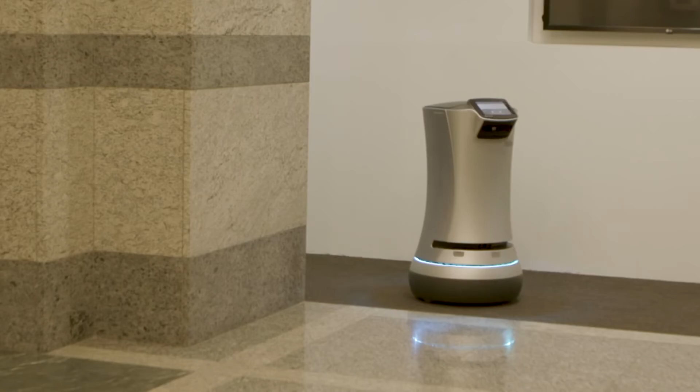Singapore is running out of space to develop and prosper. There are more developments now, and it's harder to find land. Now, the little red dot is being re-engineered for the 21st century. Nobody has done it before. This is the only job that allows you to work on a smart city project in Singapore.

We are going from about 350 megawatts of solar to 2 gigawatts of solar, and that's a huge jump. New megaprojects using state-of-the-art technologies will harness the power of the sun. It's a kind of new for Singapore to have solar panels on water.

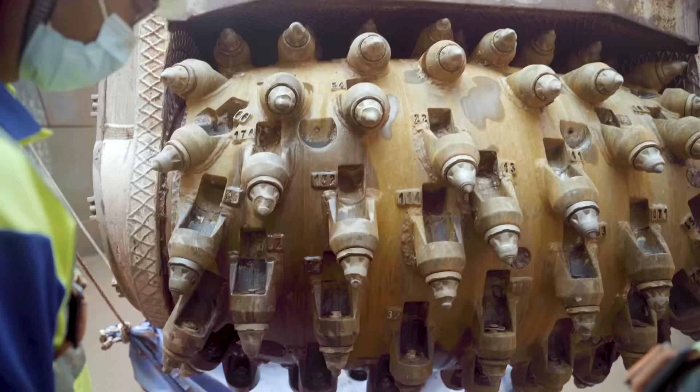Automate its ports. I can't imagine. We will be developing a 60-plus berth. And dig deep. I did not believe the space-saving part until I saw it with my own eyes. This is what engineering is all about.

All designed to find more space and allow Singapore to flourish. This is a journey into Singapore's Tomorrow City.

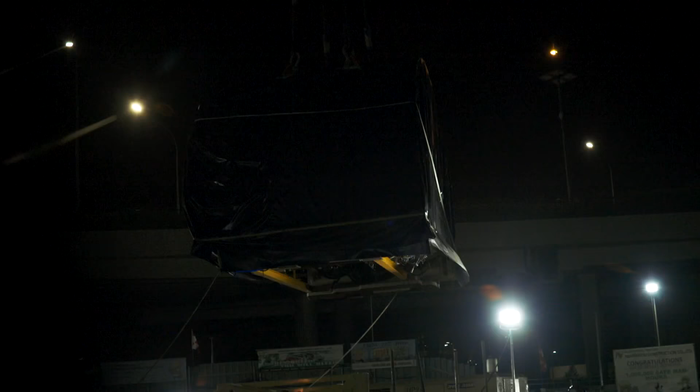It's a critical moment for one of Singapore's new megaprojects. One of the biggest machines on Earth is being delivered to a site in the heart of Singapore. Slowly wire. A tunnel boring machine, or TBM. Today we are lifting all the main bodies for the TBM, just unloading at the site. We do this at night because the oversized cargo is only allowed to transport after 9:30 p.m. The TBM is so big that all 6 parts have to be delivered one at a time.

In Singapore, space is a luxury, both on the surface and at its only landfill at Pulau Semakau, which is reaching full capacity. To create more space, one project is going underground to revolutionize waste disposal and water management.

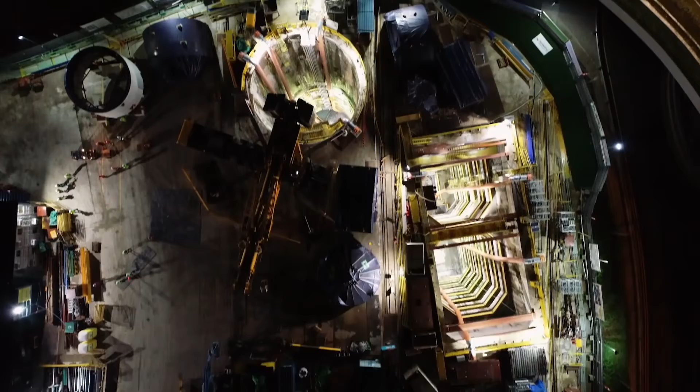The Deep Tunnel Sewerage System, or DTSS, is one of Singapore's biggest underground projects at about $7 billion. This is the second phase, where 19 TBMs will carve out hundreds of kilometers of tunnels underground that will take wastewater across the island to different reclamation plants. To maximize space, the DTSS system will be dug deeper than any existing road and rail network, at depths between 35 to 55 meters.

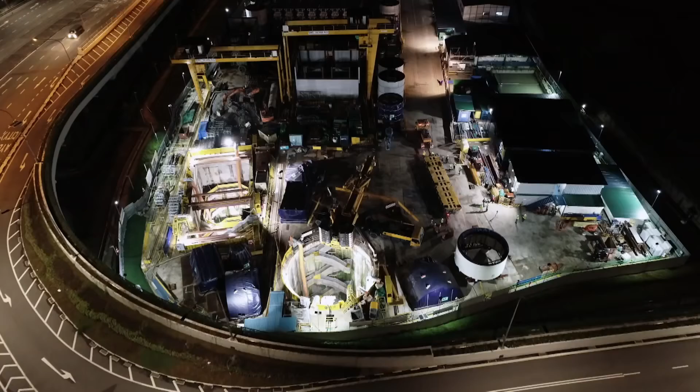This is one of 50 shafts, the entry into the underworld, a gaping 10-meter wide hole known as Shaft M. It's nearly 50 meters deep.

The work site at Shaft M is crammed with construction equipment, and lifting supervisor Johnson and his team must now find space for these 6 massive parts. Okay, swing stop, stop. Slowly wire down. The space constraint is the biggest challenge for us today.

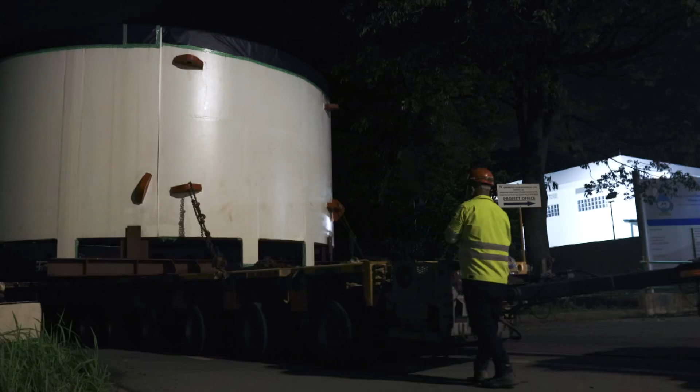Going to shift the front body lower, 2 meters inwards. Then we're going to prep the cutter head unloading area with the timbers. It's the heaviest and it's the most delicate as well.

Once all the sections of the TBM are delivered and unloaded, they must be lowered one by one into Shaft M and then reassembled underground. The most important section of the entire TBM is the cutter head.

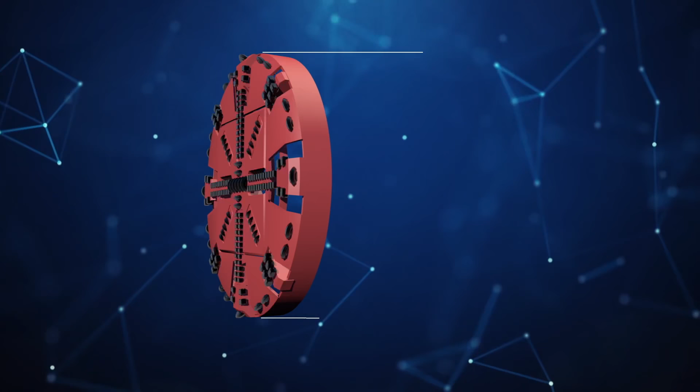The cutter head has a diameter of 7.5 meters and comprises of dozens of heavy-duty cutting discs that chew away at rock at a rate of approximately 3 meters every hour.

Behind the cutter head comes the power source. The TBM is multi-purpose. As the cutter head bites away, this section erects the walls of the tunnel, which are made from these concrete rings.

The cutter head generates huge quantities of waste or slurry, and this section of the TBM is its waste disposal system. To drive the TBM forward, thrust cylinders push against the newly built tunnel rings with a force great enough to shift an elephant.

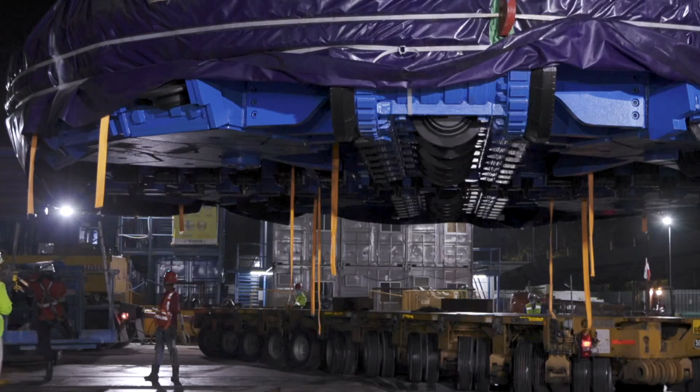The cutter head arrives at the site. All right, a little bit, swing right. The engineers take special care unloading this spaceship-like equipment. Okay, swing stop, swing stop. Boom up. Boom up. Okay, boom up, stop.

The cutter blades are precision engineered. The team positions wooden blocks underneath to prevent any damage to the blades. Slowly swing to your left.

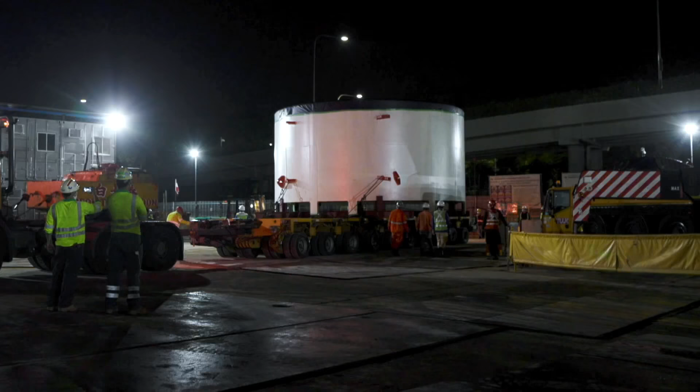By the time the engineers complete the unloading, dawn is breaking. Job well done, guys. Good job.

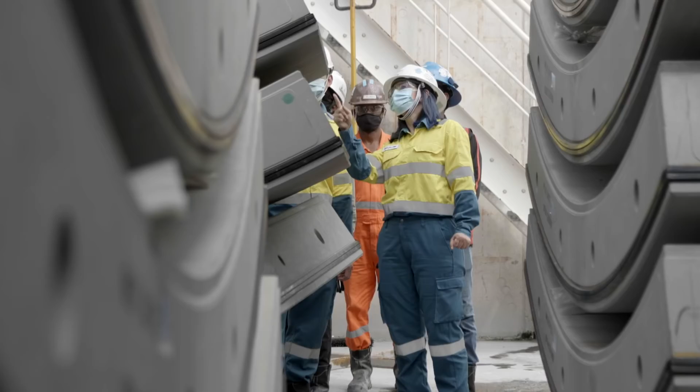It will take another 6 weeks of preparation before the TBM sections are ready to be assembled in the tunnel below Shaft M. The deep tunnel sewerage system is not scheduled for completion until 2025. It is being built to last for at least a century. And so, engineers will inspect every detail of work during construction to make sure nothing is overlooked. One of the engineers on the inspection team is Wu Lai Lin.

So what are they doing in the shaft now? Today's exercise. I've been doing DTSS since DTSS 1, which was completed in 2008. So yes, we have been talking about the Deep Tunnel Sewerage System, or DTSS, for many, many years.

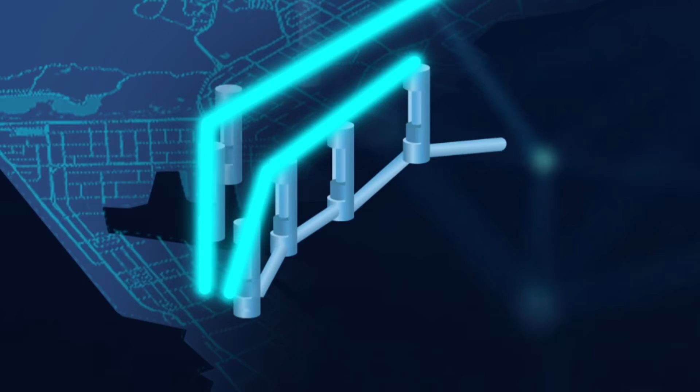By the time the DTSS is completed, it will free up 300 hectares of land above ground, more than half of which is currently being taken up by pumping stations and reclamation plants. The 19 giant TBMs still have 100 kilometers of tunnels to construct.

DTSS-2 follows the heavily used Ayer Rajah Expressway. To get all the TBMs working away below ground, 50 vertical shafts must be sunk along the route of the expressway, without disrupting traffic. So the first thing we do is site the launch shafts, sink the launch shafts, and then we would launch the TBMs from these shafts.

Then the TBMs will tunnel along happily, hopefully, until they reach the retrieval shaft, which is where we take out the machines.

Siting shafts along the Ayer Rajah Expressway is a challenge. Space is definitely one of the challenges. Can we find space on the surface to site our shafts? Or more importantly, to site a shaft big enough where we can actually launch our tunnel boring machines. There are more developments now, so it's harder to find land for your shafts and things like that.

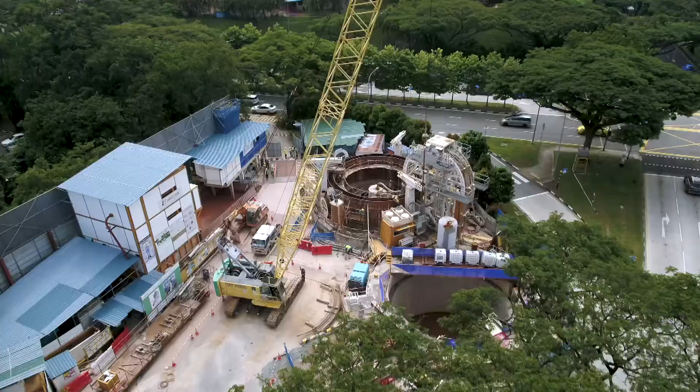At Lower Delta Road, a new piece of machinery is changing the way shafts are being constructed and saving space at the same time. It's called the Vertical Shaft Sinking Machine, or VSM. I did not believe the space-saving part until I saw it with my own eyes.

It enables the construction of a shaft without the need for men to be inside the shaft excavating away. You can actually use it in very tight places, very close to existing buildings.

Site engineer Guo Hao is here to check the progress. One shaft has already been constructed and another is underway. So this shaft is approximately 10 meters wide in diameter and is approximately 50 meters deep.

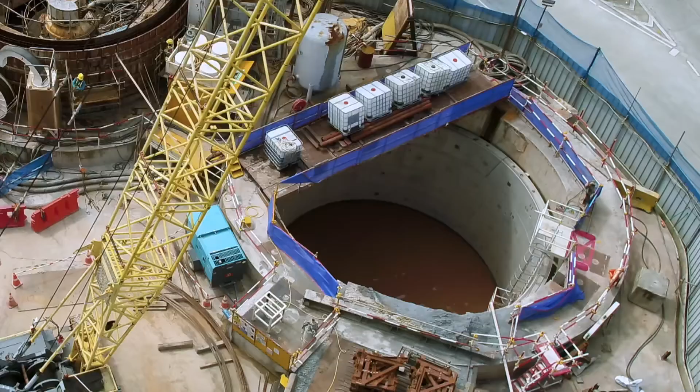How's the site progress? Everything goes well. Today we are going to finish the calibration of the VSM. So after that, we'll fill water. Okay, start excavation.

The VSM we are currently using is the only VSM machine in Asia, as it's a relatively new concept compared to a traditional excavation method.

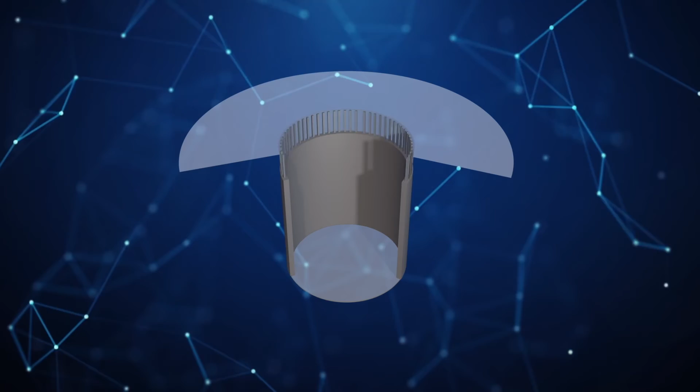The system works like this. First, a narrow shaft is excavated to a depth of about 10 meters. Then it's lined with prefabricated concrete rings. Now the shaft is ready for the VSM, which has a telescopic arm with a road head that can swivel around to dig deep. The engineers must carefully calibrate the robot arm before they set it to work.

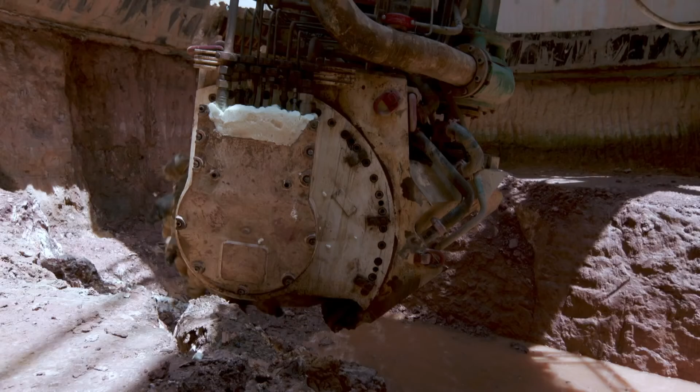So how a VSM works is that there's a cutter drum. This cutter drum will move towards the shaft in and out as the arms turn. Is it okay? Length is 80.

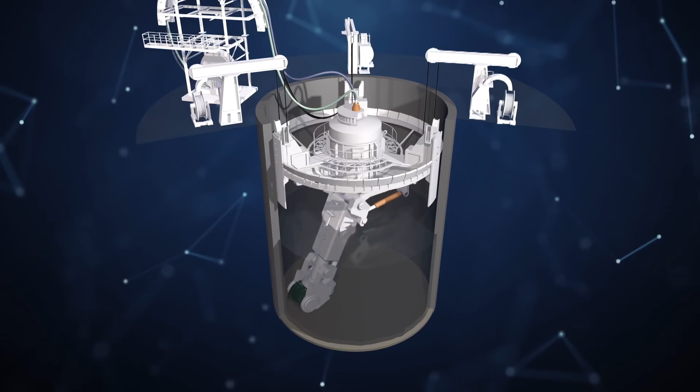The VSM is doing vertically what the TBM, or tunnel boring machine, is doing horizontally underground. As soon as the cutter drum excavates a complete circle of 100 millimeters, both shaft and cutter drum will move downwards. It takes at least 10 hours to dig 1 meter.

As the shaft sinks, engineers will insert concrete rings that form the shaft wall. Okay, stop, checking. Okay, please measure the length. Okay, done, ready. That's all. Thank you very much. Okay.

This is the last time engineers can enter the shaft. Once the telescopic arm is calibrated, the opening will be filled with water for the machine to begin the excavation work.

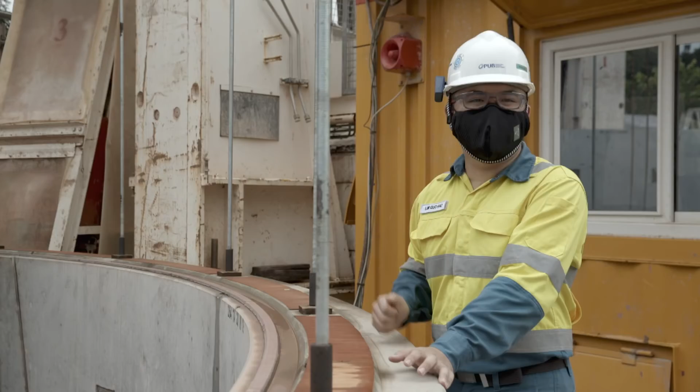This is what engineering is all about, where we come up with solutions to reduce the risk to workers and to actually improve the efficiency of excavation.

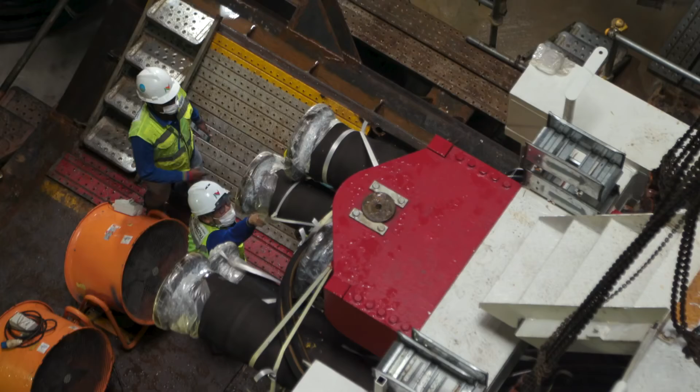The VSM system lets the tunnelers do their job in cramped urban sites, like the one at Lower Delta Road on the expressway. But underground, the engineers will soon confront the biggest challenge of all, Singapore's subterranean geology.

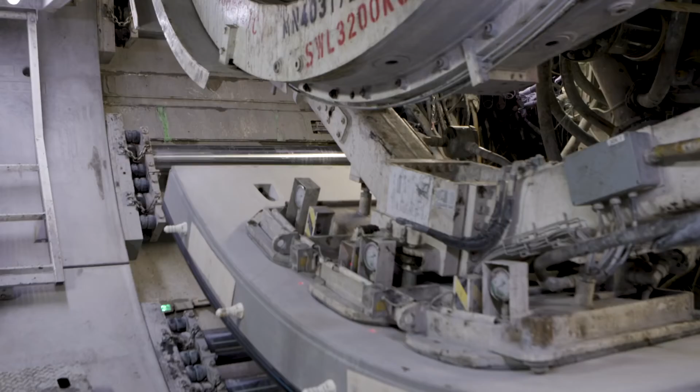Singapore's planners are spending billions of dollars to build a new waste disposal system, the DTSS. Huge tunnel boring machines are at work deep beneath our city. Down here, the biggest problem for the engineers is the geology, the hidden world beneath our feet.

So between where I am standing now and perhaps just behind the camera, the ground conditions can differ greatly. So it's difficult for a tunnel boring machine to be catering to different types of ground conditions that are changing so rapidly.

Adam Switzer is a geologist at Earth Observatory of Singapore. He has spent many years studying the geology of Singapore and understands its challenges for tunnelers.

Tanjong Rimau is one of the few places locally where the hidden world beneath is exposed. These rocks were laid down millions of years ago and over time have been twisted and folded by the movements of the Earth's crust. Much of the geology of Western Singapore is like this. Lots of different rock types, very closely placed together, and very complicated in terms of folding and small faulting, which means that in engineering, that adds a lot of complexity.

So if you look here, the rocks change a lot over a very short distance. You've got your engineering system running, drilling through sandstone, and all of a sudden you come into a muddy shale like this unit here, or you run into a bed full of big boulders, which we have in Singapore as well. Then your engineering is going to run into problems.

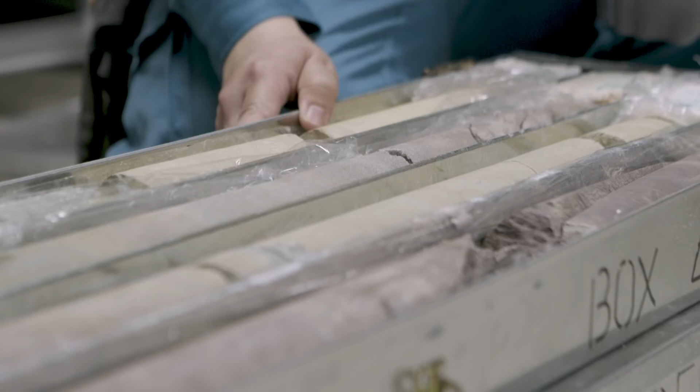The exploratory boreholes were sunk here before the tunneling started. Despite that, ground conditions still proved tough for the cutter head to tunnel through.

Can you switch to the normal screen? Yes. We are at 2.9 bar. Yes.

For engineer Christian Schilling, one of the most important tasks is maintaining the cutter head. As the TBM inches forward, the cutter blades are constantly worn out, and the huge machine must be stopped periodically for maintenance. In subterranean Singapore, it's a tricky operation.

So this is an example of a mixed face, right? Yes, a mix of rock and soil. And these are the rock. And these are the soil. Ah, these okay, can break. I can feel that this is like soil, much softer, and then the one you actually have here is actually quite hard.

To understand the ground conditions, engineers examine samples of the rocks excavated by the TBM and confirm that the rock face they've been tunneling through is made up of a mix of hard and soft materials.

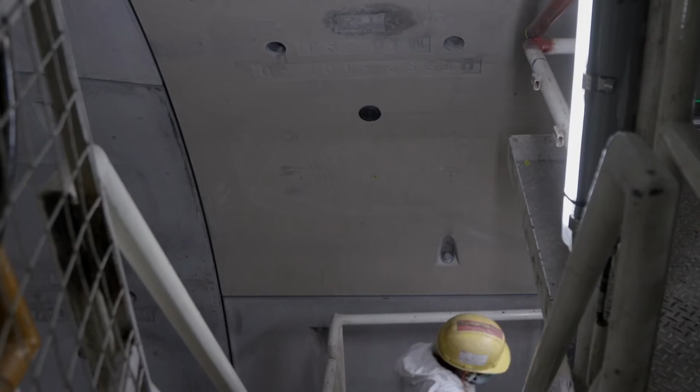At the moment, we have stopped the TBM for a cutter head intervention. To carry out a cutter head intervention, or CHI, a team of engineers enters the space at the front of the TBM.

But Schilling has to choose the right moment, when the ground ahead is stable and less likely to collapse on the workers. The geology, let's call it interesting. Up to now, on these over 500 meters, we had mainly soft rock. Now we are, since about 200 meters, in a soft geology, mainly clay. It's never a good time, because of course we want to continue tunneling. But we have to.

That time we need to check what's the level of the rock and what's the level of the soil, and based on that we prepare this face mapping.

The TBM is tunneling 50 meters below sea level, and the air pressure down here is much higher than at the surface. For the team, it will be like diving underwater, and like divers, they will need to acclimatize to the pressure.

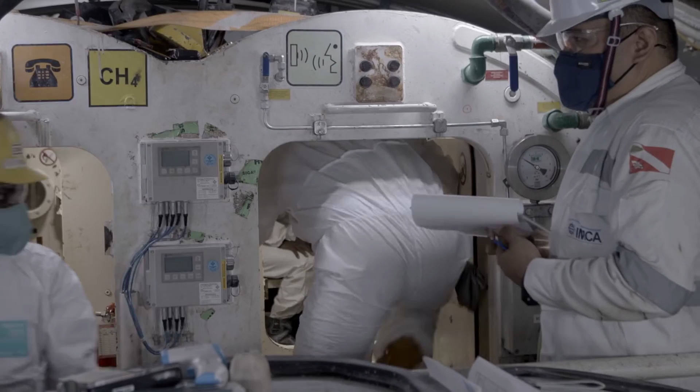This particular one, we have finished changing our disc cutters. That was 10 pieces this time. And now we still have some scrapers to change, the soft ground tools. And then tomorrow we should be on the way again.

The TBM engineers can only plan ahead if they have a good idea of the kinds of rock and soil that the TBM must cut through. As they push forward underground, geologist Adam Switzer and his colleagues continue to map out Singapore's subterranean world.

Today, they've come to the north to investigate the mysterious Sembawang Springs. It's an area famous for its 70 degrees Celsius water source, and this.

We place the eggs here, and we leave it about 1 hour. Maybe the thing will be boiled. Our eggs were a bit runny. We put them 20 minutes under the hot tap, but they were good. It was tasty, yeah, and it was fun to be able to cook them outside and in the water.

The Sembawang hot springs do more than cook runny eggs. They provide vital clues to Singapore's subterranean geology. Singapore isn't known for earthquakes and volcanoes, so the puzzle is, where is all this heat coming from?

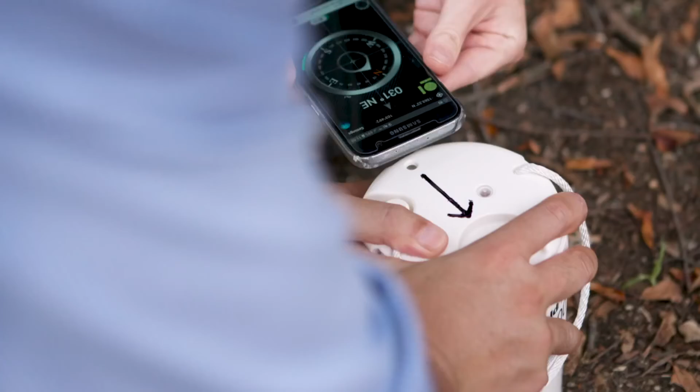At the Earth Observatory of Singapore, geophysicists are using state-of-the-art technology to solve the mystery of the springs and to look deep under the surface of the island. The hot springs are evidence of an active fault line located somewhere deep below. A fault is a fracture in the Earth's crust, and here it heats groundwater that is conveyed to the surface at Sembawang to steam up those springs. Faults can also become active and cause earthquakes.

But where exactly is this fault? And could it pose a danger for the DTSS tunnelers?

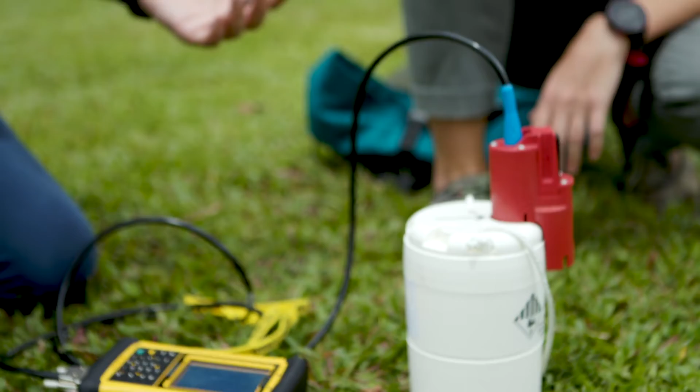So this kind of instrument is actually our ears, and the earthquakes or any other kind of seismic source are like our hands patting on a watermelon. So when this energy penetrates through the earth, it carries information about the underground structure. The team positions seismometers at locations all over Singapore to record the data.

I'll adjust the position a bit. Yeah, it's ready. It's working now. You can just take it off and then sit.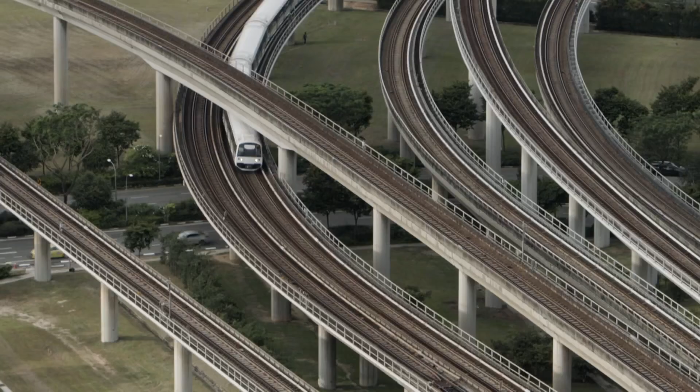Over a period of 5 weeks, the seismometers record vibrations from road traffic, construction, and far-off seismic events. The result is a digital portrait of underground Singapore, which they hope will pinpoint the location of any dangerous fault line. This is actually in the very high frequency.

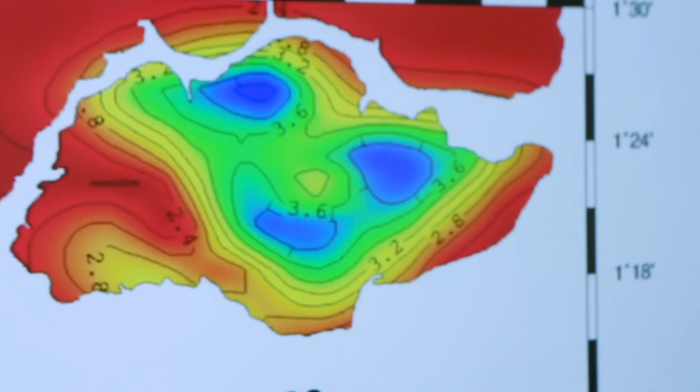So this kind of map tells us what kind of rock is under the ground. These numbers represent the speed of the shear wave traveling within the earth. We can work out where this fault line is, which separates the granites in the middle and the Jurong Formation sediments in the west. And that's really important when there's construction work underground.

The team will need more time to install additional sensors to figure out possible problems lying in wait for the tunnelers.

With expanding built-up areas and new mega projects like the DTSS, the information will provide insights and help avert disasters, like the Nicoll Highway incident in 2004.

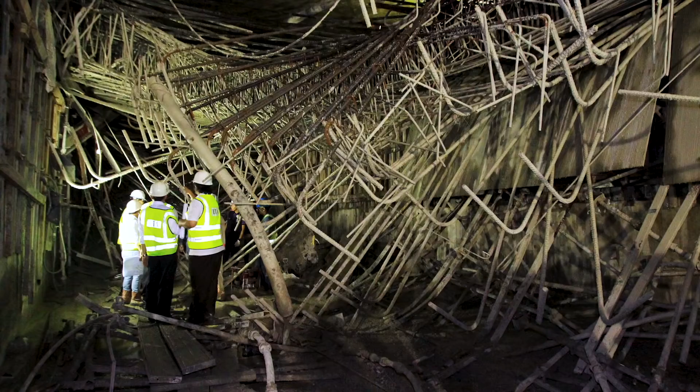On April 20th, 2004, steel supports over the Circle Line MRT tunnel below the 6-lane-wide Nicoll Highway collapsed. The disaster triggers a blackout and plunges traffic into chaos. Construction work for the Circle Line had to be stopped, and the highway closed for 7 months for repairs. The lives of 4 men were lost. This catastrophe still serves as a haunting reminder today.

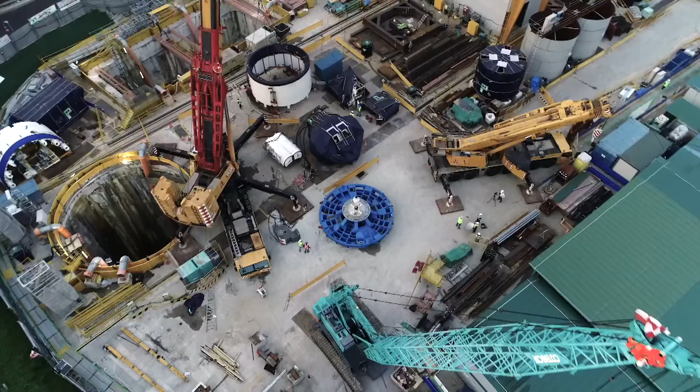Huge megaprojects like the DTSS are built to last into the next century. The tunnel is 21st century technology, but the project depends on one of the oldest of all building materials, concrete. And one of the most critical ingredients in that is running out.

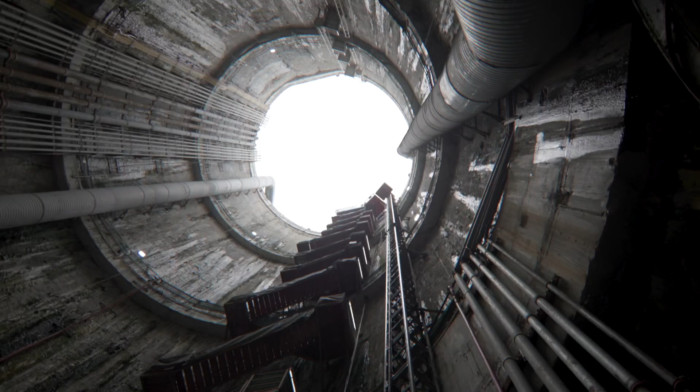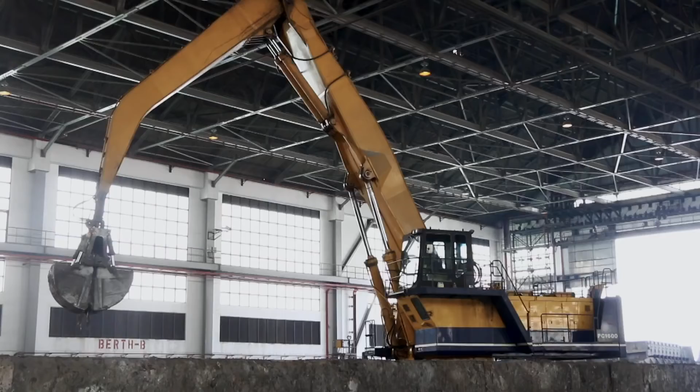There is no limit to Singapore's ambition to build the city of tomorrow and to free up space for the future. To achieve this, the new DTSS, or the Deep Tunnel Sewerage System, is burrowing deep beneath Singapore to create a network of tunnels that will revolutionize waste disposal and water management. All kinds of waste will be treated, reducing the amount of throwaway rubbish and generating energy in the process. The DTSS will redefine recycling for the future and take the pressure off Singapore's only landfill site at Pulau Semakau, which is reaching full capacity.

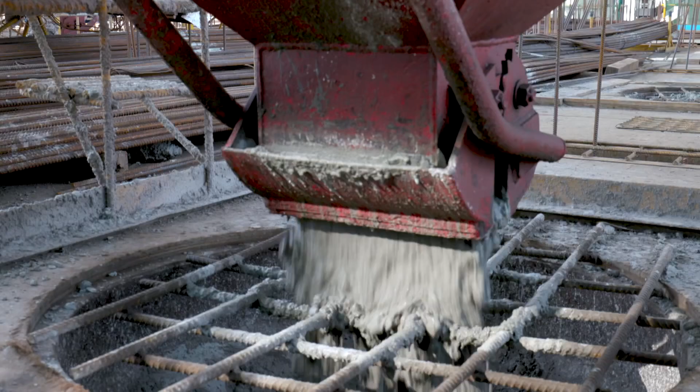But solving the problem of waste on such a scale creates another. Construction projects like the DTSS are hungry for concrete, and this demand is escalating the need for a key ingredient, sand. And sand is in short supply.

At the Nanyang Environment and Water Research Institute, researcher Zhen Hui thinks he has found a solution. Basically, concrete is made of cement, fine aggregates such as sand, and coarse aggregates such as pebble or bigger rocks. It's the binding between cement and aggregates like sand that makes it strong enough to take high compressive loads, making concrete the perfect raw material for megaprojects like the DTSS.

The sand mostly used in construction is river sand. The world uses almost 50 billion tons of sand every year. We don't have enough sand.

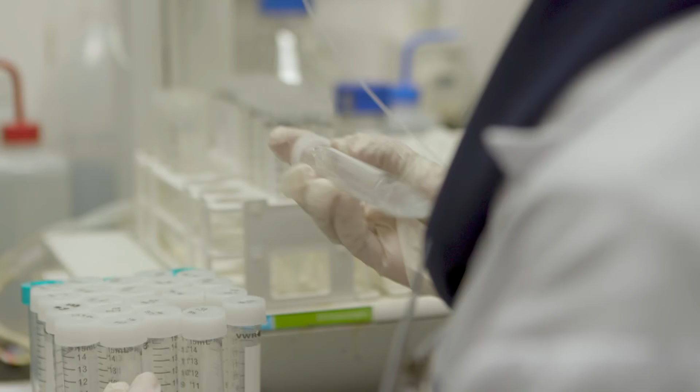Zhen Hui believes he has the answer to the sand shortage: waste. He is convinced that waste can be the new sand and a solution to better quality concrete. Our aim is to improve the quality of concrete. We have this project with NEA, this waste-to-energy research facility. We use very high temperature gasification to convert waste into very stable gasification slag. We call it new sand.

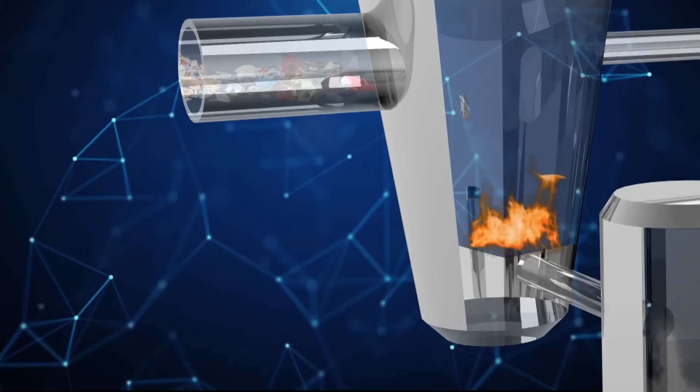The key to the process is heat, high temperatures of 1600 degrees Celsius to be exact. This produces gas that can be used for power generation and the rather unattractively named slag, or new sand. In this process, very little is wasted.

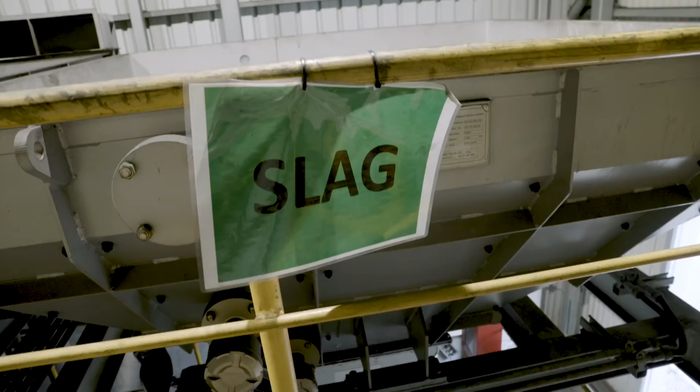This new sand is made from pure waste. We are trying to use it to replace sand at a higher ratio. This slag is a very new material, and we do not know a lot of the properties about this. Currently our research is still doing the characterization to fully understand this material.

The big question is, how does new sand compare with river sand? We can see that river sand consists of a lot of very fine particles with occasional large particles. All the sand particles are more rounded because of the natural erosion along the rivers. The consistent and rounded size of river sand particles helps them bind easily with cement.

For our new sand, the gasification slag, we can see a very distinct rod-like structure, known as glass fiber, and also very angular particles.

Zhen Hui is carrying out a test to compare new sand with river sand samples. We're doing a 50% replacement ratio. The design mix will be 4 kg of cement, 2 kg of sand, and 2 kg of slag. So we'll be putting the cement and the fine aggregate into the mixer and start the mixing process.

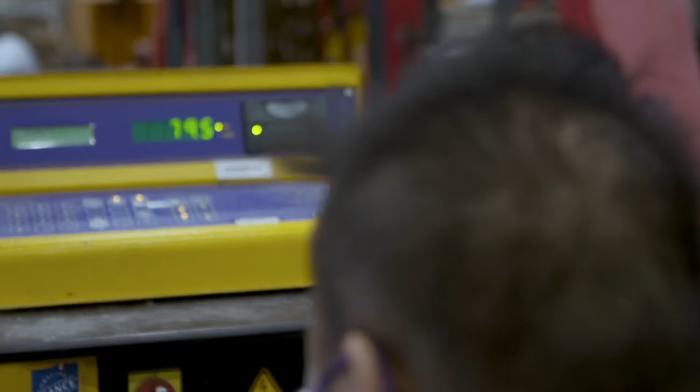His sample will now undergo a compressive test to see how much load or weight it can withstand before cracking. He starts with the typical concrete cube. In the lab setting, we test the amount of load it can take through the compression machine. We keep applying higher and higher compressive strength onto the concrete to see the maximum load it can take before it cracks or fails.

We can see that as the strength increases, the deformation increases very rapidly. Next, Zhen Hui tests the new sand concrete. The higher the number, the more load or weight the concrete cube can take. The number to beat is 82.4.

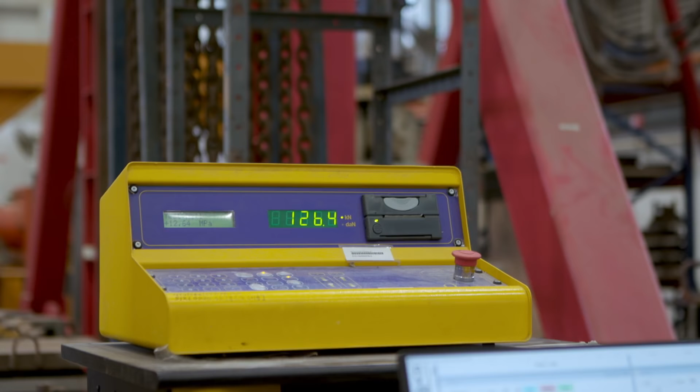In our new sand concrete, you can see that in the initial stage, as the strength increases, there is very little deformation. And the winner is new sand. The superior strength of new sand is all to do with these rod-like structures which bond with the cement. With the theory proven, this new sand concrete will soon be ready to be tested in reality.

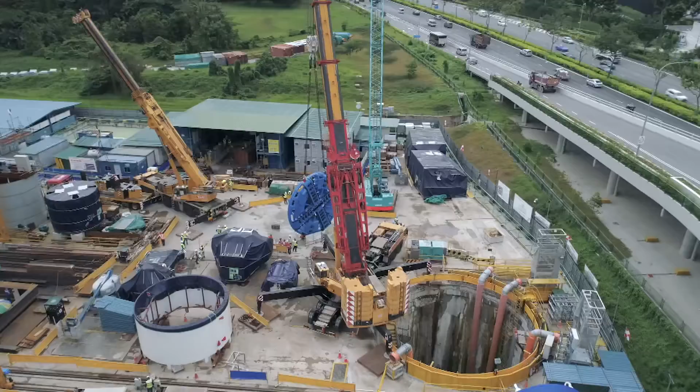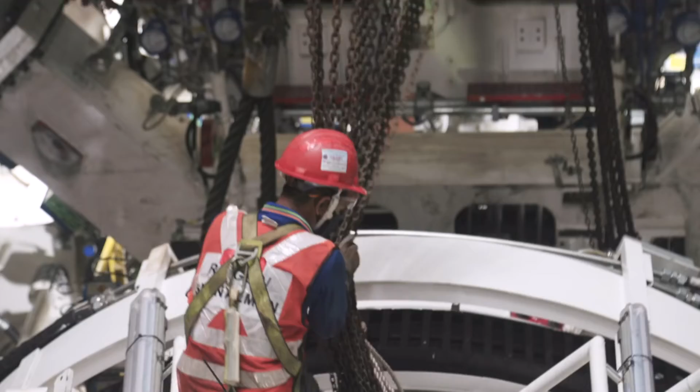At Portsdown Road, engineers have reached a critical stage in the DTSS project. Preparations at Shaft M have been completed, and it's time to lower the 6 different parts of one of the largest TBMs, also known as tunnel boring machines, into the completed shaft. It's a very tight squeeze. The entire process will take at least 2 weeks.

Okay, so it means we lower down the erector after 1 p.m., correct? Yes. So one of the milestones is to complete the assembly of the TBM so that we can proceed to the next step, which is the mining work.

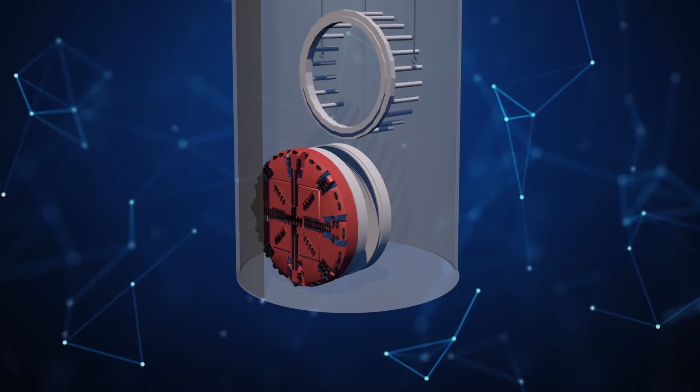Below ground, engineers begin connecting the different sections of the TBM. The completed parts are pushed into a pre-excavated opening to make space for the next piece. Then comes the second stage. These gantries will house the control cabin, electrical supplies, and rail tracks to transport tunnel segments.

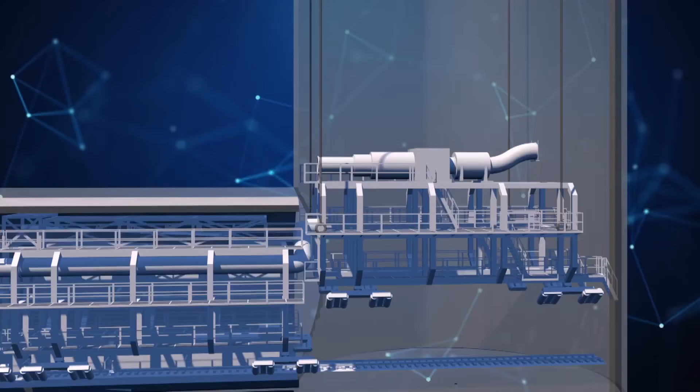As soon as the TBM has chewed its way about 100 meters into the rock, the remaining gantries will be lowered into the shaft. When completed, the machine will be 130 meters long, the length of 10 buses. This is one of the biggest TBMs so far in Singapore. That's why it needed to be segmented into a bottom part and a top part.

So to make sure the alignment is correct, everything is properly sealed. During the assembly, we need to pay attention that all these seals are staying in place.

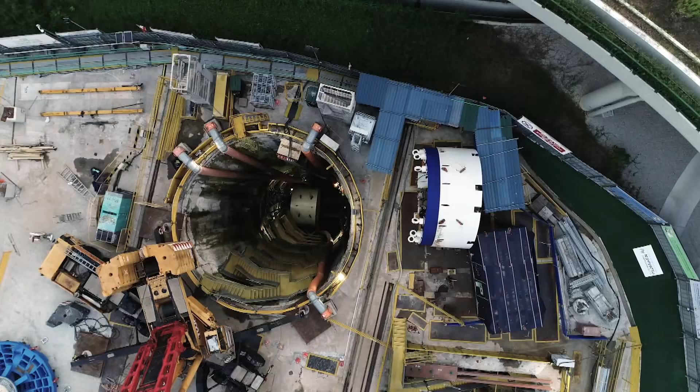Senior project manager Uli is another tunneling veteran. Today, he has come to the Portsdown Road site to make sure the assembly is proceeding according to plan. It doesn't take long for eagle-eyed Uli to discover that there's something wrong.

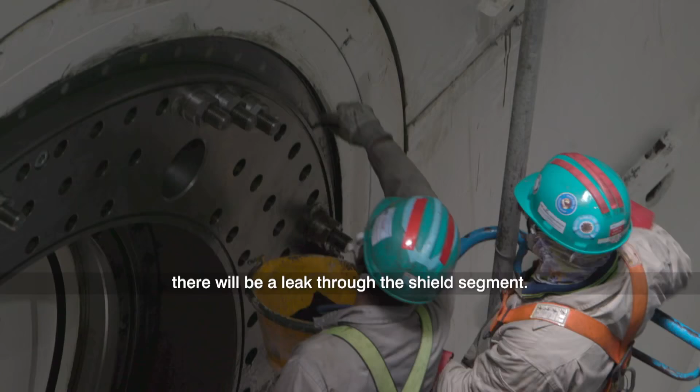I've been down to the shaft and have inspected the tightening of the bolts and the status, and I've reported to the main contractor. If the bolts are not tightened, we cannot proceed with the cutting wheel installation. The TBM is applying support pressure at all times to the tunnel face, stopping it from collapsing. So if the bolts are not tightened properly, there will be a leak through the shield segment.

The only solution is to work through the night to tighten the bolts, all 280 of them.

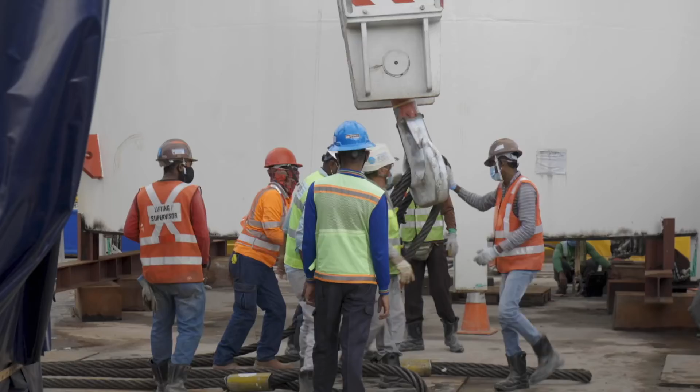The next morning, Uli returns to the site to find out if the problem has been resolved. Hi Uli, what's the situation? Yeah, we are ready. So now we are coiling up all the wire into the drum, making sure all the wires sit quite nicely in the drum. Okay, then we'll be ready to hook up.

When the cutting wheel is just 1 meter above the cradle, we'll slide the front body forward. This is to prevent damage to the rotary coupling.

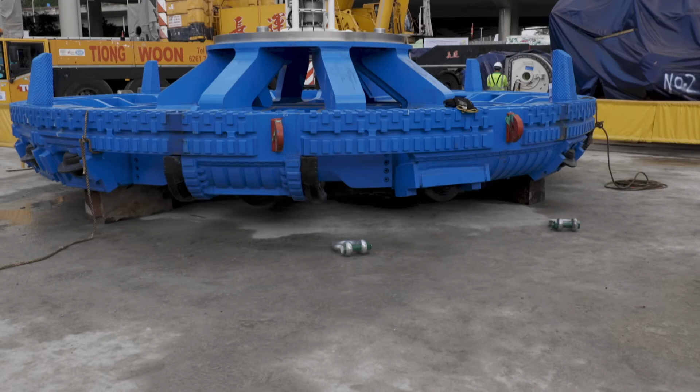This is the cutting wheel, the biggest and heaviest section of the TBM. Its size and weight explain why Uli is so cautious.

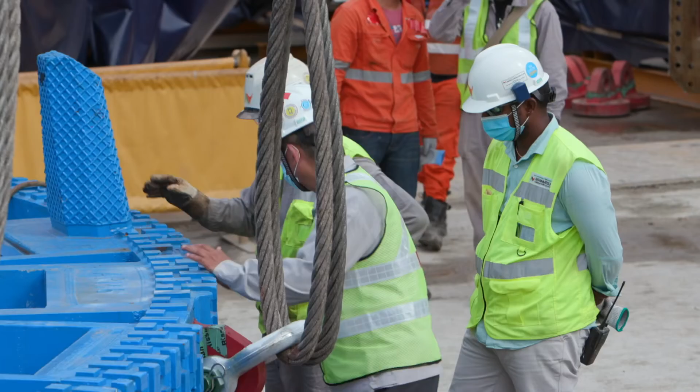We shifted the TBM backwards so that there is a big enough gap to fix the cutting wheel in front of the TBM. Nevertheless, it's getting very, very tight. Now the tricky process of lowering the cutting wheel 50 meters down to the shaft bottom can begin.

And it's a very tight fit. Space is 500, yeah, it's very tight. We have to make sure that it's not swinging and touching anywhere.

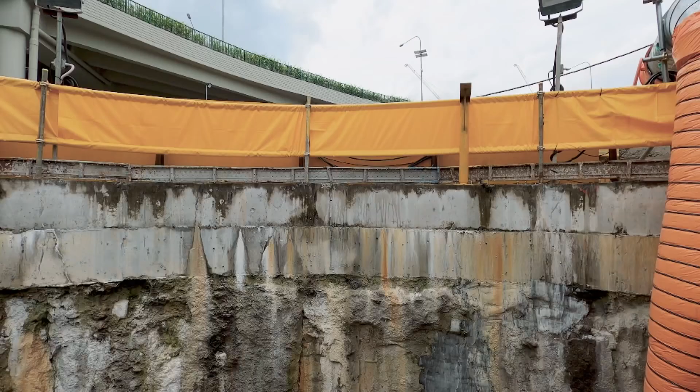There's just a 5-centimeter gap between the cutting wheel and the shaft wall. The rotary coupling was actually colliding with a shield on top. But we managed to make up enough space to fit the cutting wheel down.

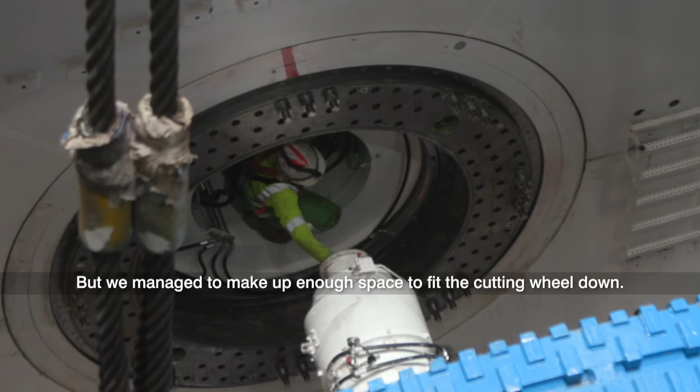After 2 hours, the TBM section reaches the bottom of the shaft safely, 1 day late. The engineers are relieved. The hardest part is over, and the cutting wheel can now be attached to the front body.

So far the progress is okay. Of course, the plan schedule will be delayed 1 day, but we sure can catch up.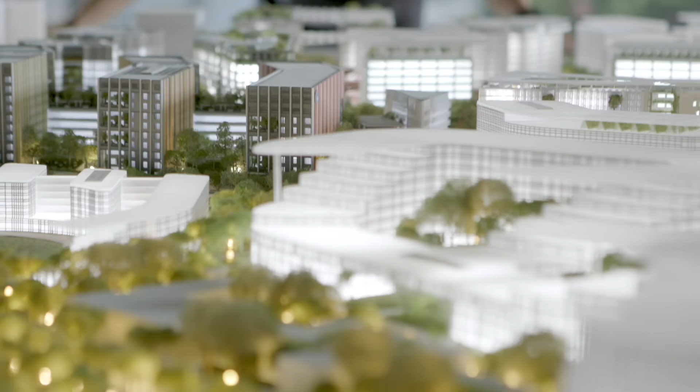Going underground is an important solution to Singapore's diminishing land space. A new urban scheme at Punggol in northeast Singapore is going to show that putting transport links underground is a way to return city streets to the people that use them.

Space is a luxury in Singapore. To create more room on the surface, projects are going underground. But city planners have come up with another way to tackle the problem. And it's simple: plan cities in advance to maximize space.

That's the concept behind the smart city. And the first in Singapore is Punggol, where a new district has been planned from scratch.

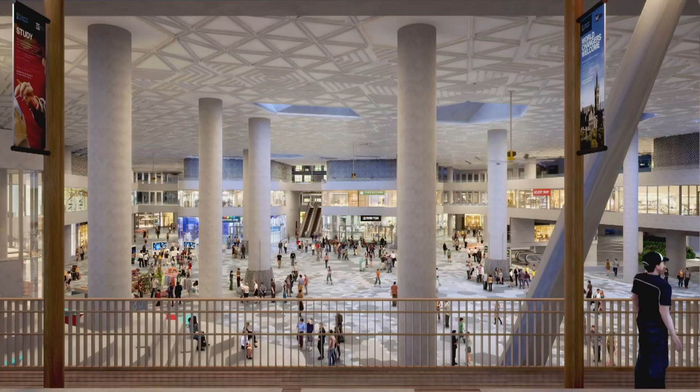Led by Gilbert Cher, the team has designed a digital district which is targeted for completion in 2024. It comprises a business park and a university campus, an environment where business professionals, academics, students and their families can call home.

So Punggol Digital District, together with a few other districts around Singapore, are one of the ideas of decentralization. To maximize space for people, the planners made a crucial decision.

All transport links are being built underground, from the new MRT connector to huge car parks, leaving the ground level free for pedestrians and cyclists.

I can tell you where's my favorite angle of the model. When you look at this model, it's actually right down here, looking towards the west. You see the main street, which is really Campus Boulevard. You can actually see how the business park and the SIT campus are really stitched together into one very cohesive whole.

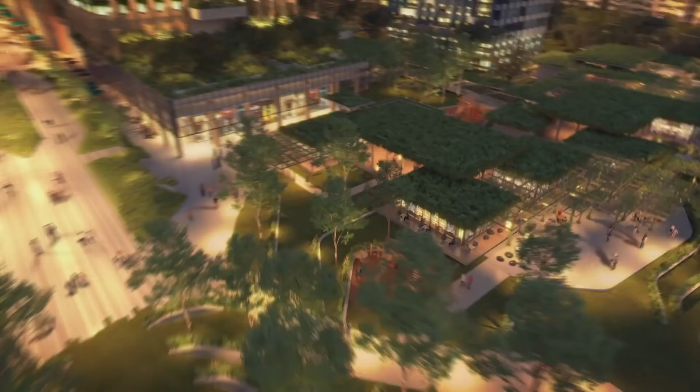So this is the whole concept of space swap, where we are looking to have deeper academia-industry collaboration. And that's not all. Room service.

At the beating heart of the smart district in Punggol is new software. It's being developed by James Tan and his team. It's called the Open Digital Platform. It allows them to test out smart systems and real-world scenarios virtually.

Hey guys, can you zoom out? Can you see the details of the construction progress?

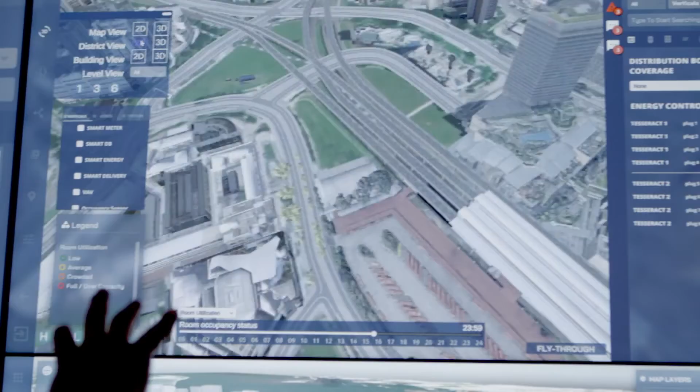Yeah, this is what we call a digital twin. Why we do this is because we are able to have a good spatial view of what's happening in the real world, especially when all this real-time sensor data comes in.

Nobody has done it before. This is the only job that allows you to work on a smart city project in Singapore.

The idea behind the Open Digital Platform is to integrate smart systems with everyday life. At some point, we will need to integrate with the PDD meeting room booking system. If no one is using the room, we should do a reality check that the meeting room is at zero.

At this view, I don't have one shot showing where's the one that is overcrowding. So what we hope to achieve is to derive better efficiency through energy savings and, of course, manpower distribution.

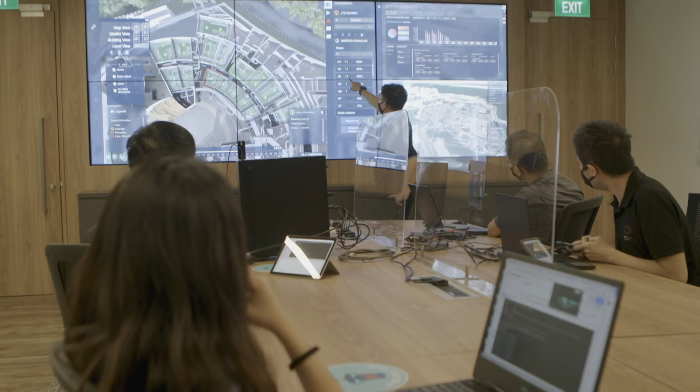On the other hand, we want to make people's life easier. In fact, we were coining the idea of giving people 27 hours instead of 24 hours, because we think they can save 3 hours out of every day through less waiting time, faster moving into your office, leaving the office, and so on.

While the digital team works out the smart services two meters underground, another team is spearheading the physical construction of the Punggol Digital District.

Any idea on the concourse level or the shop drawing status? In preparation for the tunneling works that will connect the digital district to the transport network, are we reaching B1 already? This one we are targeting to complete one month after the MRT roof is completed. But this is a temporary slab, so we are following closely with this construction sequence.

Project engineer Wing Ze has worked on this from the start since 2017. We are working towards the Tunnel Breakthrough event, which is a big milestone for JTC and LTA collaboration. We are doing okay, but of course all the construction projects are affected by COVID, but we are catching up.

She is in charge of preparing the basement works. So now the machine is behind. How far away? Still outside. Okay.

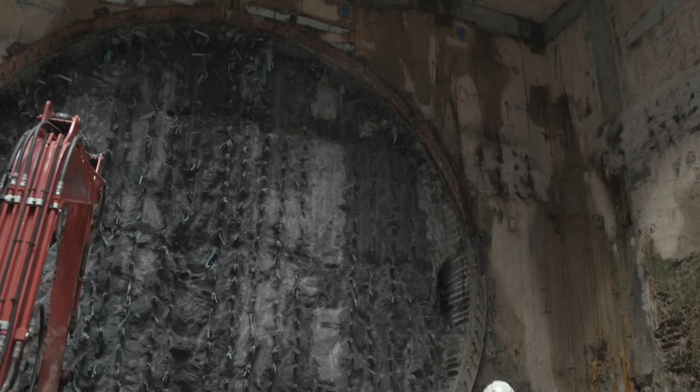The giant TBM, or tunnel boring machine, that has eaten through over 700 meters of soil from the existing Northeast MRT line, is about to break through right here. One of the key challenges is that we are going under a live LRT pier and a viaduct, so obviously we tend to get a little bit more cautious. We're going very close, making sure that we don't affect the LRT structure.

When a TBM tunnels close to critical areas underground, it's high alert for the whole team across the project. These critical points are known as influence zones. The challenge is to actually monitor the instruments in the TBM carefully so that we don't over-excavate, leading to sinkholes. The results will be very disastrous.

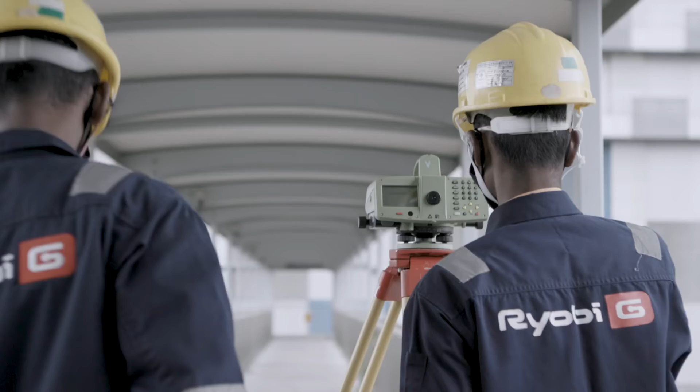At Benoi Flyover, the team is on high alert. Two tunnel boring machines are tunneling in close proximity to the overpass. The two massive TBMs working together may destabilize the flyover, so the engineers continuously monitor the structure for any signs of weaknesses. So monitoring is extremely important.

All our monitoring data is gathered on this online platform so that you can access it at any time. So let's say you're getting readings that give you maybe excessive settlement, we will be alerted.

Please take note that our tunnel is approaching the expressway. Any anomalies or significant changes, please do highlight to your engineer.

We are here below the Benoi flyover, which is considered one of the critical structures for the project. So along this area, we have installed three sets of instruments for each of the TBMs, and this will be monitored during the mining works.

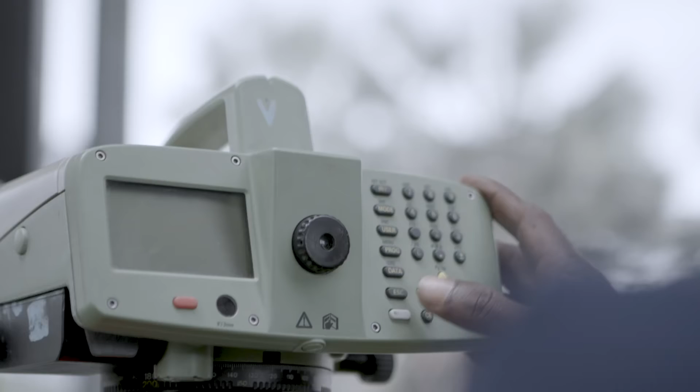The risk is that as the TBMs move forward underground, the soil above the tunnels compacts, causing a depression to form at the surface and, in the worst-case scenario, develop into a sinkhole. In densely packed Singapore, this would be catastrophic. This is a big area, and in Singapore, most of our areas are quite congested, so you are either underneath a road, or underneath some kind of services and everything.

These instruments are part of a vital early warning system if anything is amiss. Readings from the sensors are closely monitored. With his decade of experience, Christian Schilling keeps a close eye on the progress.

The TBM is moving constantly forward when we are tunneling. Everything okay here? Okay, boss. Good. So far, no warnings from the sensors above ground. So basically we see from the survey system the actual position of the TBM. We have our navigation screen that shows us where we currently are, how far we are off the alignment.

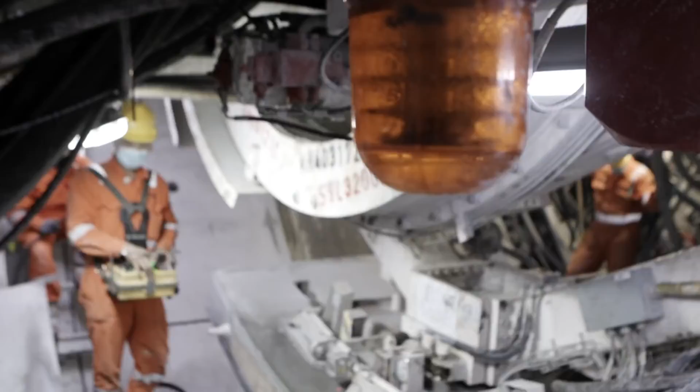Finally, the TBMs pass the critical risk zone, and the next tunnel ring can be built.

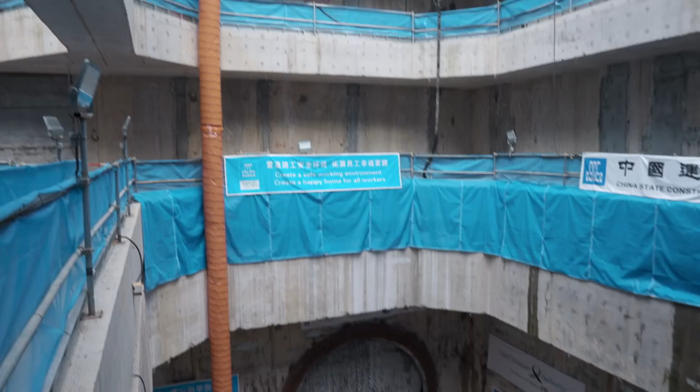Back at Punggol, after tunneling past the vital LRT pillars, the last few centimeters are about to give way, signaling the end of the MRT tunnel and the machine's journey. Everyone gathers for this momentous event.

Fantastic breakthrough. Very well coordinated and planned. All thanks to you. Such a good job.

It's a job well done for the team at Punggol. The moment you see the crack, you know that it's coming next. And within two minutes, the whole wall collapsed. You can hear all the cheering from everybody. That's how we knew, from the entire team, JTC and LTA, that finally we've done it.

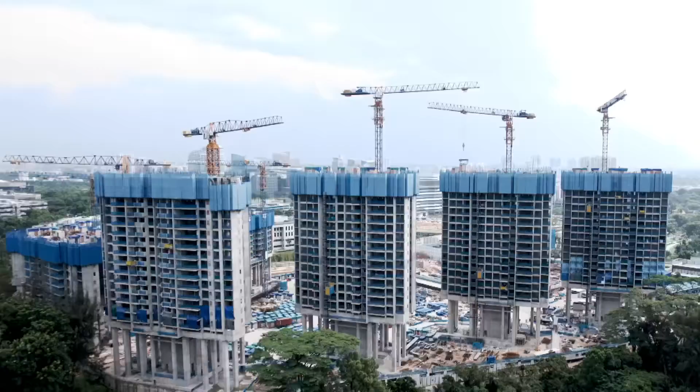DTSS-2 still has four years before it will be completed. As Singapore reaches for the sky, building gleaming towers of glass and steel, deep below, 19 giant machines continue to excavate a network of tunnels stretching 100 kilometers. This will transform how Singapore manages water and waste, propelling the state into the next century and building a new pillar of Singapore's tomorrow city.